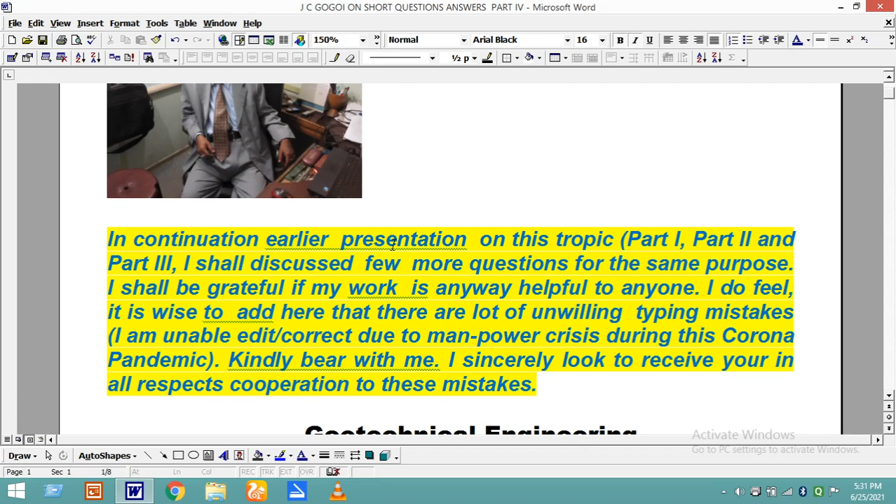One more important aspect I am adding here, that there are innumerable typing mistakes or printing mistakes, whatever it may be, which I am not able to edit or correct. I am looking forward to your active cooperation and to bear with me.

Today I am starting part 4.

Question: a 4-storied building was tilted and differential settlement of 150 mm was noticed. This 4-storied building, after construction, after few years, had a differential settlement of 150 mm noticed. Another condition is that the building cannot be demolished due to several adjacent buildings being there. The building was resting on timber pile foundation. So this building, having a differential settlement of 150 mm, resting on timber pile foundation - what shall be the safe proposition to restrict further settlement?

The answer options are: demolish top story, ground improvement, pile foundation at periphery, enlargement of pile cap to behave like footing foundation, or none of this.

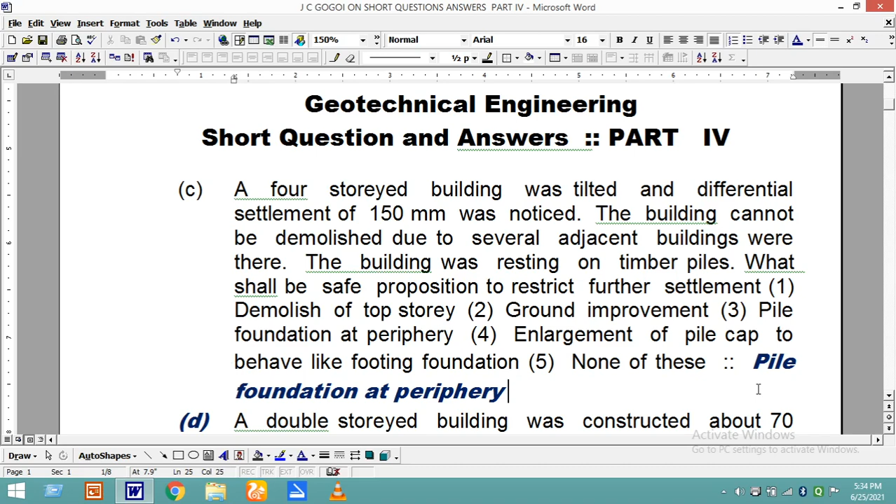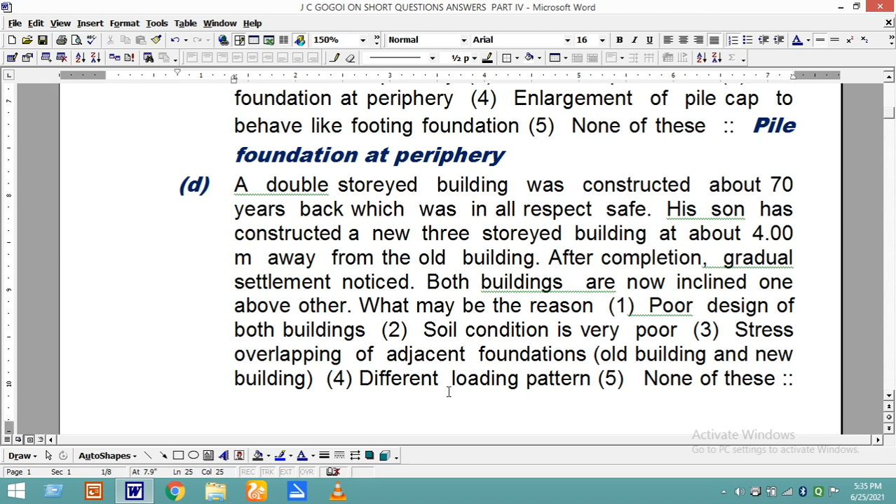A double-story building was constructed about 70 years back, which was in all respects safe. His son, in the second generation, constructed a new 3-storied building about 4 meters away from the old building. After completion, gradual settlement was noticed, and both buildings are now inclined one towards the other. What may be the reason? Answer options are: poor design of both the buildings, soil condition is very poor, stress overlapping of adjacent foundations of the old and new building, different loading pattern, or none of this.

Poor design - we cannot accept that because the life of the old building is 70 years with no such settlement reported. Soil condition being very poor was also not agreeable since the old building has stood for 70 years. So the main reason for settlement is stress overlapping of adjacent foundations.

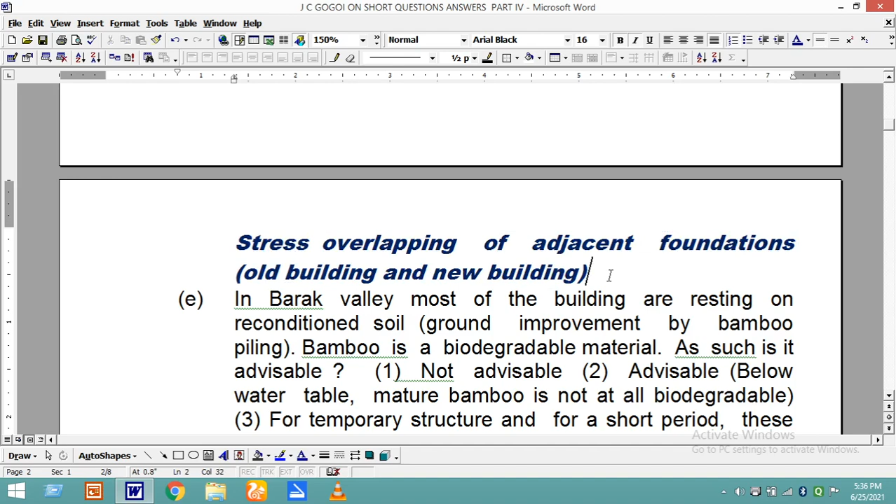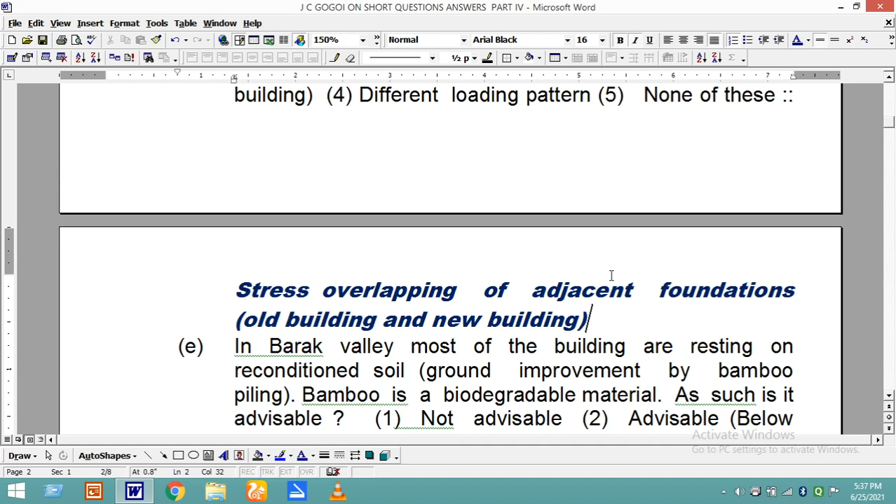Stress overlapping of adjacent foundation, because the buildings are closely spaced. The difference is 4 meters, meaning at least 2 meters from this building. The foundation will go out a minimum of 2 to 3 meters from this side, and from the other building, 2 to 3 meters from that side. So there is a stress overlapping - that point is heavily loaded, and for any soil strength, when there is different loading, almost double the loading, there shall be settlement.

In Barak Valley, most of the buildings are resting on reconditioned soil, ground improvement by bamboo piling. Bamboo is a biodegradable material - as such, is it advisable? The answer is not advisable, except below the water table. Mature bamboo is not at all biodegradable below water table, but for temporary structures for a short period, these are suitable, and the structure may collapse all of a sudden otherwise.

In most of the towns of Barak Valley, buildings are 3-4 stories, but the formation soil of Barak Valley is of carbonaceous shale origin. In the present situation, these are behaving like CH, highly plastic clay, but the origin is carbonaceous shale. So soil condition is not so good enough - up to 5-6 meters the soil condition is not good enough. So it is advisable to do ground improvement by bamboo nailing or bamboo piling.

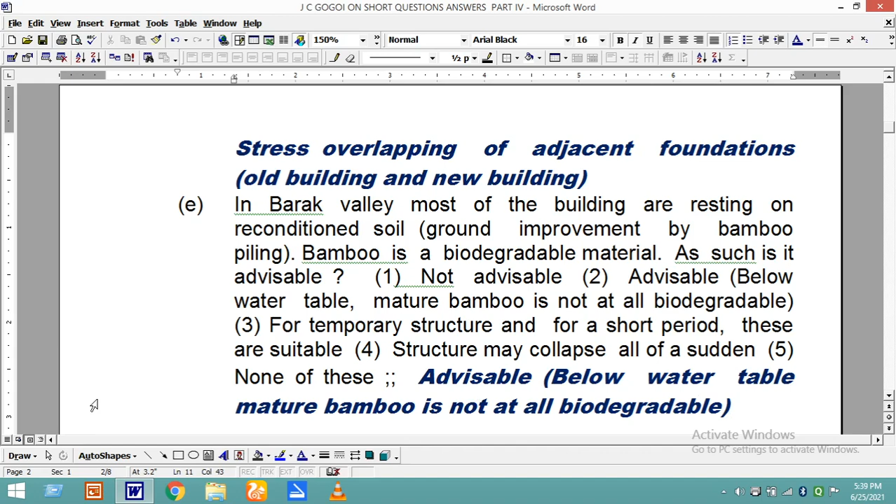Below water table, advisable. Below water table, mature bamboo is not at all biodegradable.

In rock bed, RQD, rock quality designation, is an important identification of strength of rock mass. The SBC, safe bearing capacity of rock, is generally calculated from uniaxial compressive strength, which we normally call UCS.

And discontinuity factor, discontinuity spacing, discontinuity thickness. Discontinuity factor is discontinuity spacing and thickness of discontinuity.

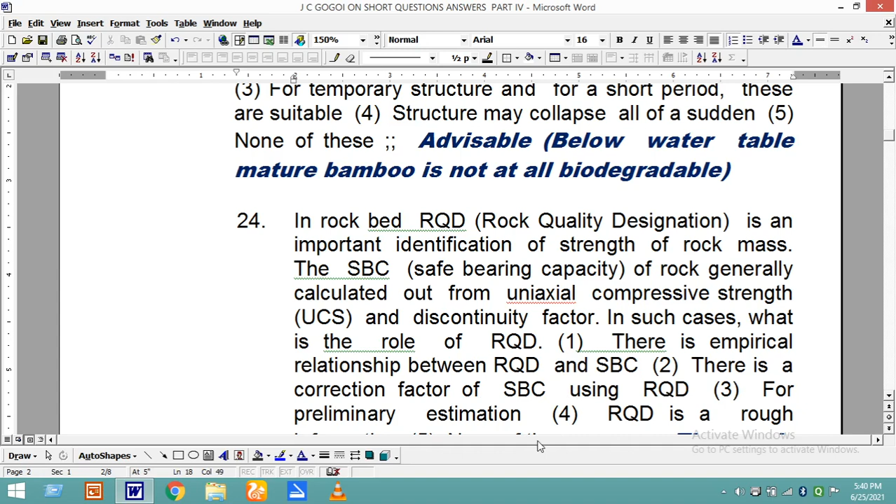In such cases, what is the role of RQD, rock quality designation? There is an empirical relationship between RQD and SBC, a correction factor of SBC using RQD. For preliminary estimation of SBC, RQD is a rough information. None of this - the correct answer is there is an empirical relationship between RQD and SBC.

Basically, when RQD is on higher side, the hardness of rock is increasing, that means shear strength of rock mass is higher. RQD is based on joints and fissures. More the joints, less the RQD.

So it will give us, before the present IS standard 12070, before publication of that IS standard, earlier the SBC was calculated from RQD value itself.

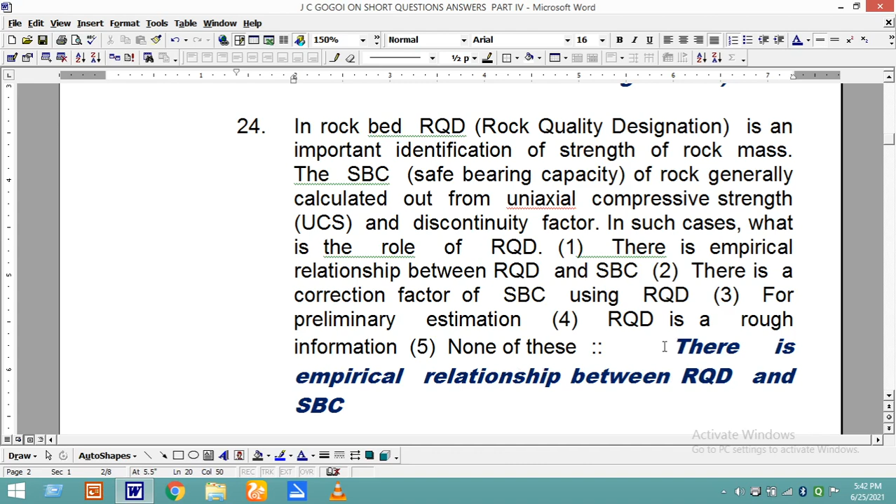SBC of rock bed was calculated with safety factor of 12 as 1 MPa against a settlement of 4 mm.

After construction, height of the superstructure required to be increased, resulting in increase of loads on foundation. In such cases, how much SBC can be increased without violating the IS clauses? Options: 1.5 MPa, 2 MPa, 3 MPa, no further increment, none of this.

You see, in rock, our permissible settlement as per IS code is 12 millimeter. So here we are getting 2 millimeter, 4 millimeter, and these are based on elastic modulus, stress-strain relationship.

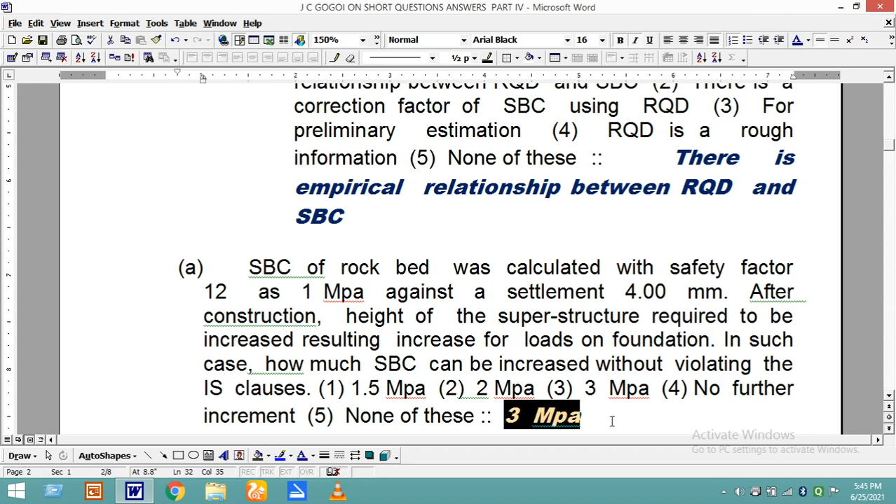A sound bedrock having SBC of 2 MPa, after due consideration of discontinuity and RQD, against a settlement of 2.5 millimeter. During construction, it was observed that the discontinuity thickness initially was very thin, in micromillimeters, but at the lower end it was found as 10 centimeter, greater than 10 centimeter thickness of discontinuity.

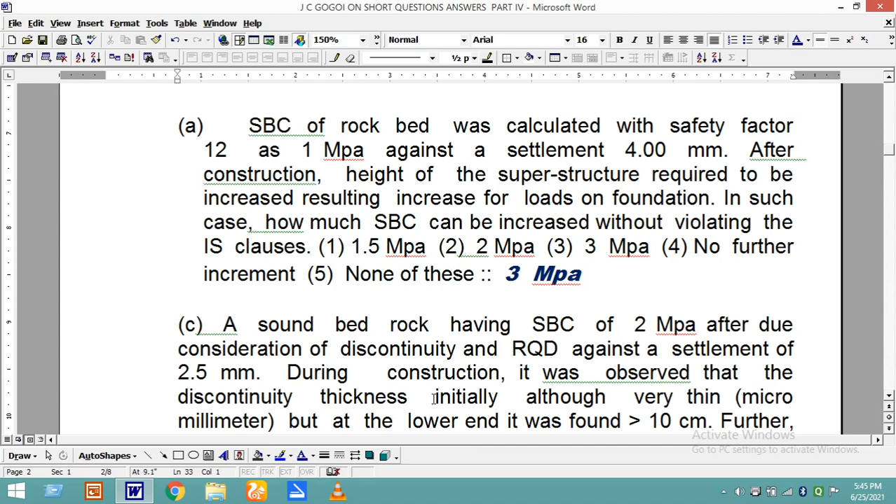Further, the discontinuity was at slope. Now, what inference can be drawn?

Options: SBC should be checked again considering discontinuity as 10 cm. Discontinuities should be filled with some rich cement grout under high pressure. Rock bolting of the foundation. Foundation shall be provided at further lower depth, meaning deeper depth. And none of this.

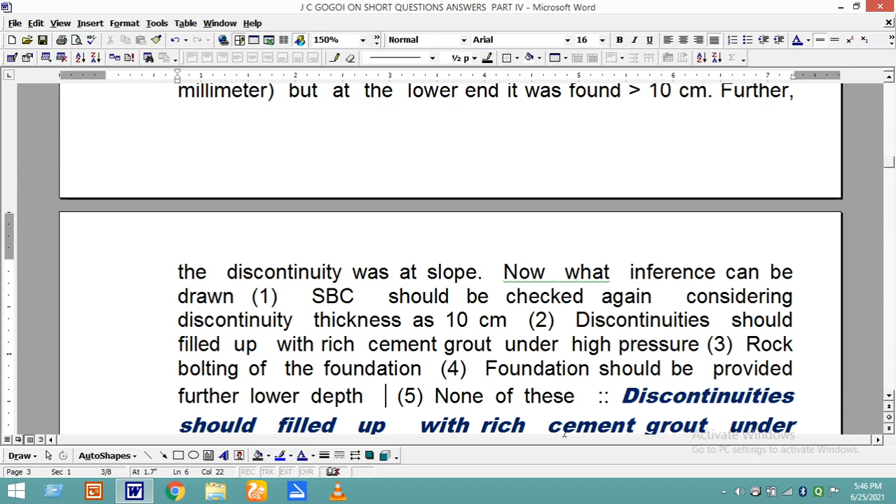In this condition, best option is discontinuity should be filled with rich cement grout under high pressure.

When there will be no joints, there shall be no discontinuity, and SBC shall be increased accordingly.

A structure was designed for a load of 1 MPa against a settlement of 6 mm. During construction, due to revision of IS code, the total load expected to be increased tremendously. Under this situation,

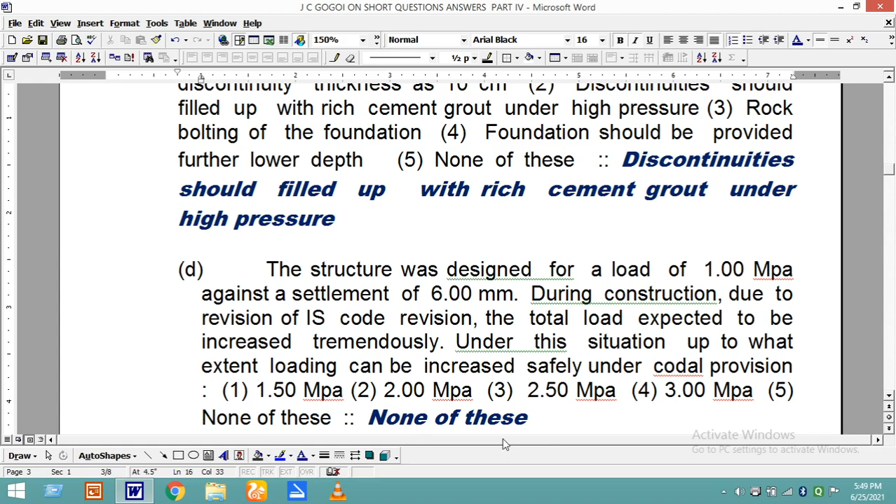An anticipated settlement of a 2 meter by 2 meter footing on bedrock, for a pressure intensity of 1 MPa, has been worked out as a settlement of 2 mm. Here one word was missing: settlement of 2 mm.

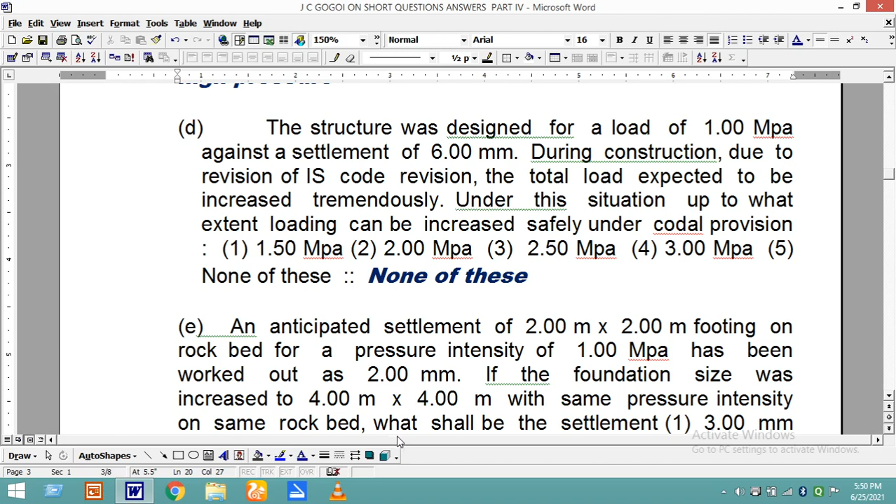If the foundation size was increased to 4 meter by 4 meter with the same pressure intensity on the same rock bed, what shall be the settlement? Here, foundation size is 2 meter, pressure intensity is 1 MPa, and settlement is 2 mm.

So because of increased load, with 4 meter by 4 meter and pressure intensity of 1 MPa, what shall be the settlement? Our question is, what shall be the settlement?

Since it is bedrock, our permissible limit is 12 mm, and we know the base is almost double. When the base is almost double in rock, it is P by B relationship, and other factors like stress-strain relationship, that is Poisson's ratio and elastic modulus, are the same for the same rock bed. So those factors are constant.

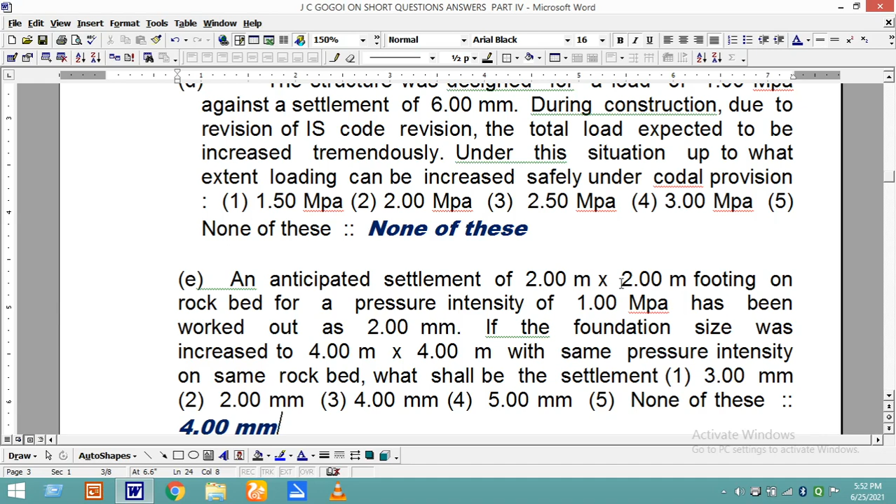It is known that fine-grained sand is derived from disintegration of rock due to rock weathering. But at the same time, it is considered that rock mass is completely free from scour. The rock may transform to fine-grained sand in future. Why is rock considered inerodible?

Given answer: weathering from rock to fine-grained sand requires millions of years, and the life of our design structure is about 100 years only. As code recommends, rock has permanent bondage, rock particles have permanent bondage. What is the difference between soil and rock? Rock compositions and rock materials have permanent bondage, but soil particles have no bondage, no permanent bondage.

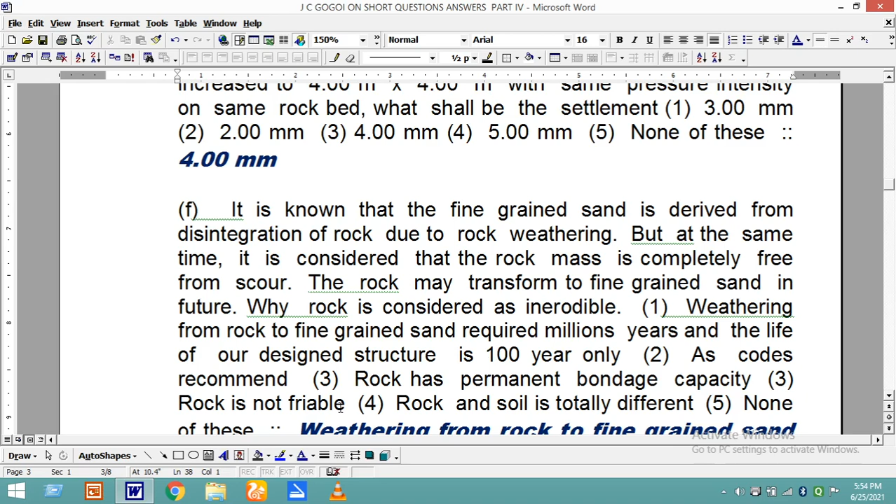Generally, although technical and engineering terms like scour exist, this is the general conception: all fine-grained sand, and all soils, are derived from rock weathering. Initially it becomes boulders, then cobbles, then gravels, then coarse sand, then fine sand, through repeated stages of weathering. Weathering from rock to fine-grained sand requires millions of years.

And the life of our design structures is 100 years only. We are designing for not more than 100 years. Some ancient monuments, like Qutub Minar and Taj Mahal, are exceptional cases, and at present their survival has become a survival process. So this existence no one can deny, but we cannot design for more than 100 years with the present working conditions, materials, and everything.

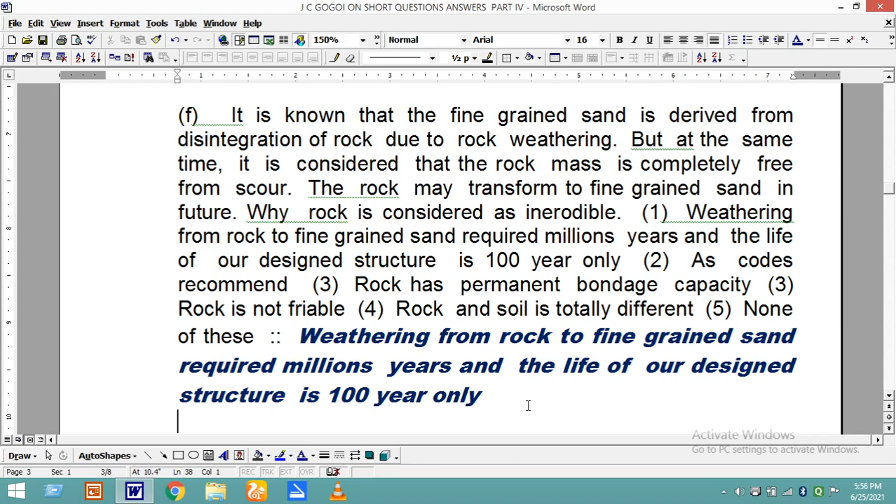Next question: generally RCC structures, superstructure, substructure and foundations are designed using the same analytical procedure, except foundation sizes for soil and rock which depend on SBC only. If for RCC structure on soil 60 millimeter settlement can be allowed, why can we not allow more than 12 millimeter in rock?

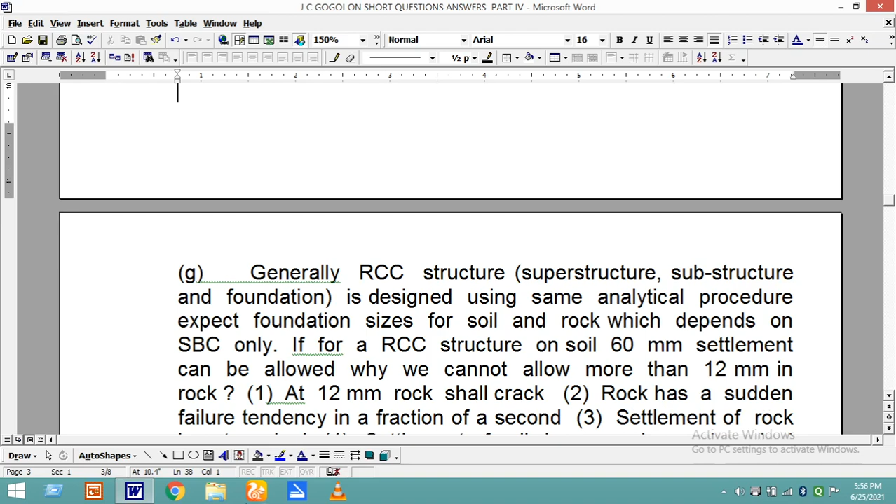In concrete, steel members are not friable. Steel gives us sufficient information, so gradually there will be some amount of tension, it gradually shears. But the concrete failure is all of a sudden. Like that, rock has a sudden failure tendency in a fraction of a second.

If you are testing rock mass in the laboratory, you can easily observe that the lowest strain diameter, no one can record. Whatever instrument it may be, digital or otherwise, it is taking stress continuously, taking stress at a nominal moment of strain. Stress is taken, and suddenly it will fail down; there will be shear. So rock has a sudden failure tendency like concrete, so we cannot go for 60 mm.

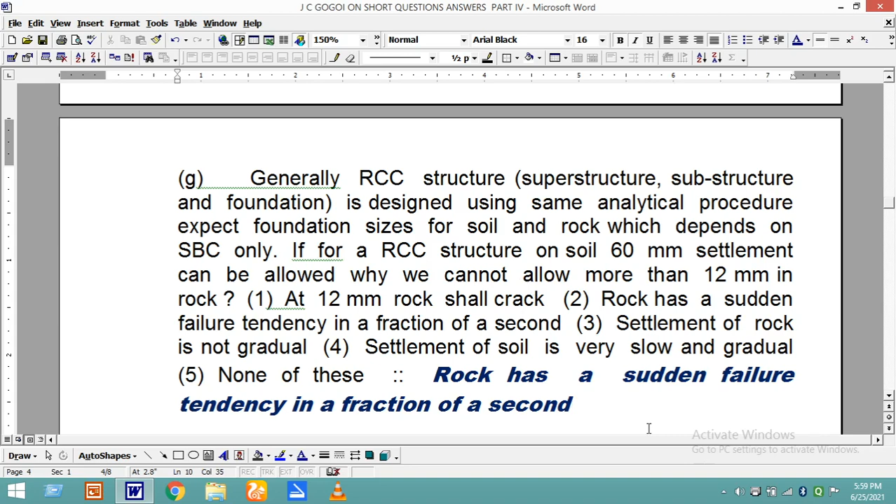What type of drilling is suitable for sampling rock samples for laboratory tests? The given answer is diamond core drilling, done slowly under nominal pressure, as opposed to percussion drilling, rotary mud drilling, or standard penetration test, none of these. The best option for getting good quality core for laboratory tests is diamond core drilling.

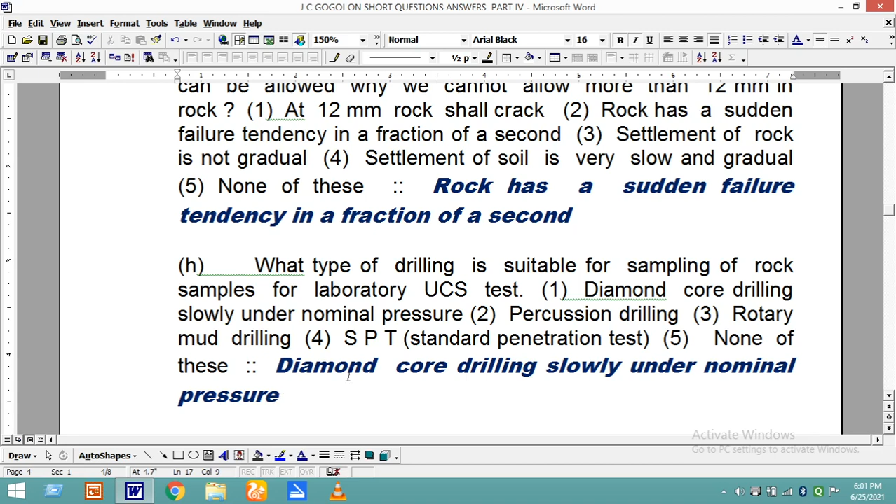Slowly under nominal pressure. Pressure shall be very nominal and slow; we should not be hurried. Slowly we can get very good quality test specimens. With percussion drilling, you can make only the hole, you cannot get core. In rotary mud bore, in some cases the core gets blocked with mud circulation, and sometimes the RQD becomes very less due to sudden shear inside the barrel itself. SPT cannot penetrate more than 1 or 2 centimeters. So diamond core drilling under nominal pressure is best for getting suitable core for laboratory tests from rock bed.

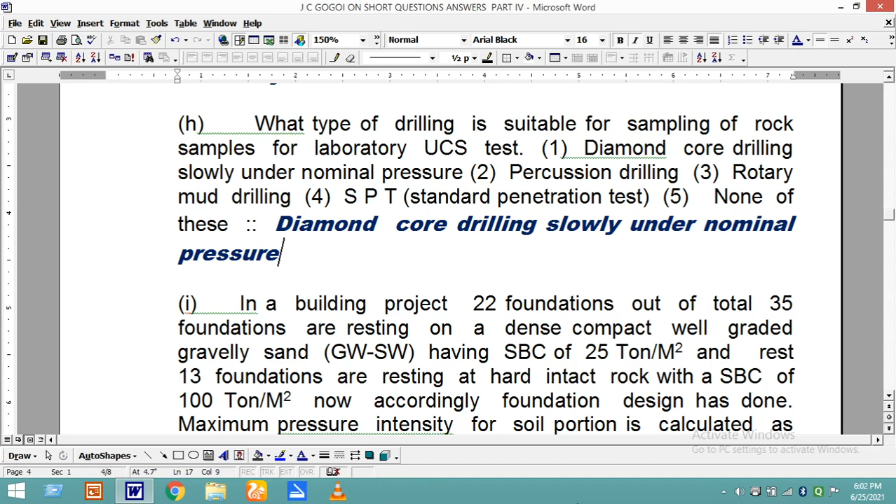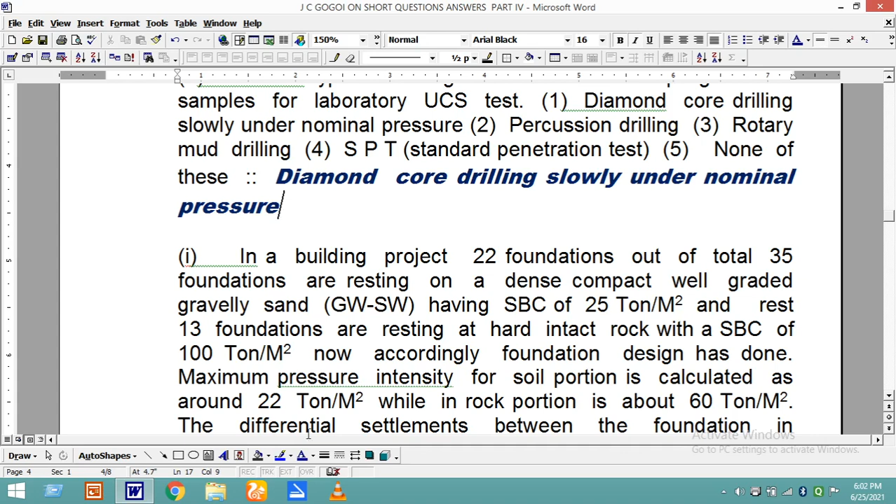In a building project, 22 foundations out of total 35 are resting on dense, compact, well-graded gravelly sand, soil type GW/SW, having SBC of 25 ton per meter square, that is 2.5 kg per cm square. The rest 13 foundations are resting on hard intact rock with SBC of 100 ton per meter square. Accordingly, foundation design has been done. Maximum pressure intensity of the soil portion is calculated as around 22 ton per meter square, while in the rock portion the maximum pressure intensity is 60 ton per meter square. The differential settlement between the foundation on soil and rock has been calculated as 1 in 600.

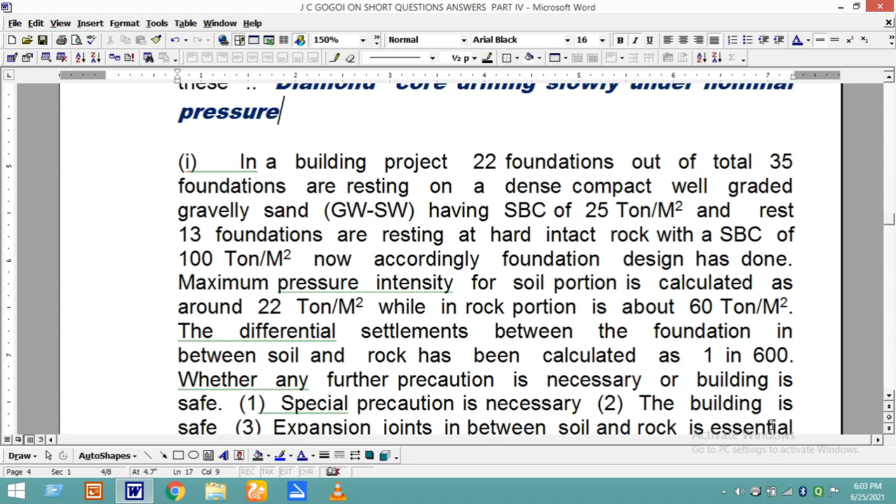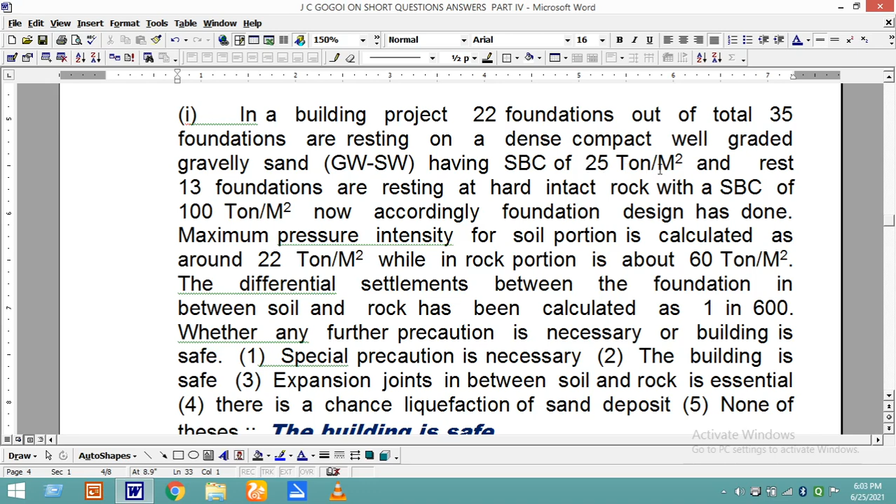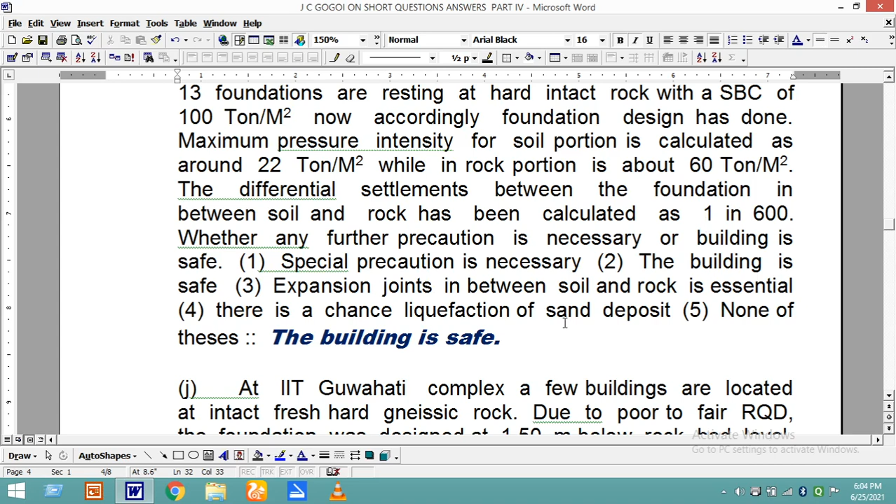The important criteria here are differential settlement of 1 in 600, and pressure intensity - 100 ton for rock and 25 ton for soil as allowable, against 60 ton for rock and 22 ton for soil after distribution of load. This is safe since it is less than 100, and this is also safe since it is less than 25. The only difference may be in settlement, since one portion is rock and the other is soil, so differential settlement is 1 in 600. Our maximum permissible limit is 1 in 400. Since 1 in 600 is smaller than that limit, the building is safe. Undoubtedly, the building is safe.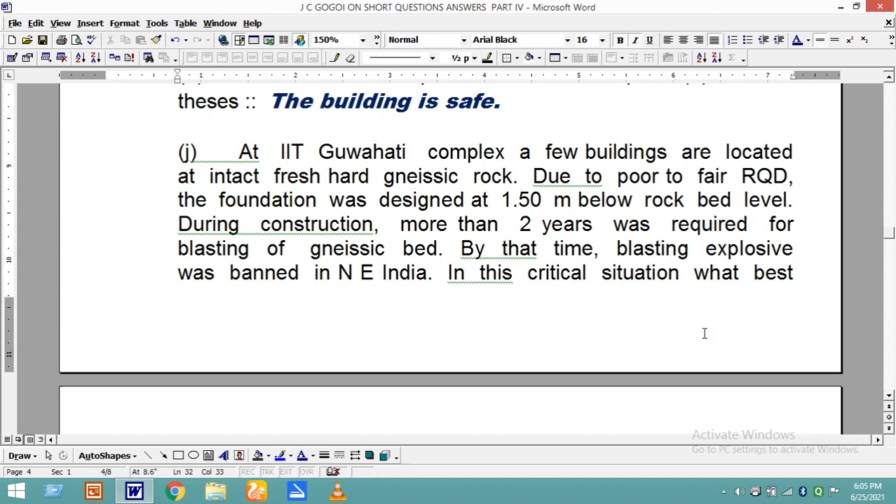At IIT Guwahati complex, a few buildings are located on intact fresh hard gneissic rock. Due to poor to fair RQD, the foundation was designed at 1.5 meter below rock bed level. During construction, more than 2 years were required for blasting of the gneissic bed. By that time, blasting explosive was banned in northeast India. In this critical situation, what can be done keeping safety of the structure in view?

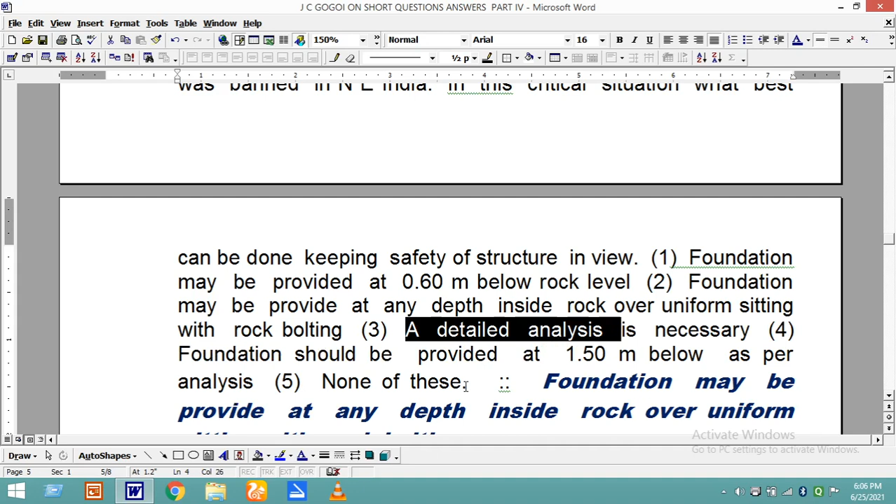Options given: foundation may be provided at 0.6 meter below rock level; foundation may be provided at any depth inside rock mass over uniform seating and with rock bolting, with detailed analysis necessary; or foundation should be provided at 1.5 meter below as per analysis.

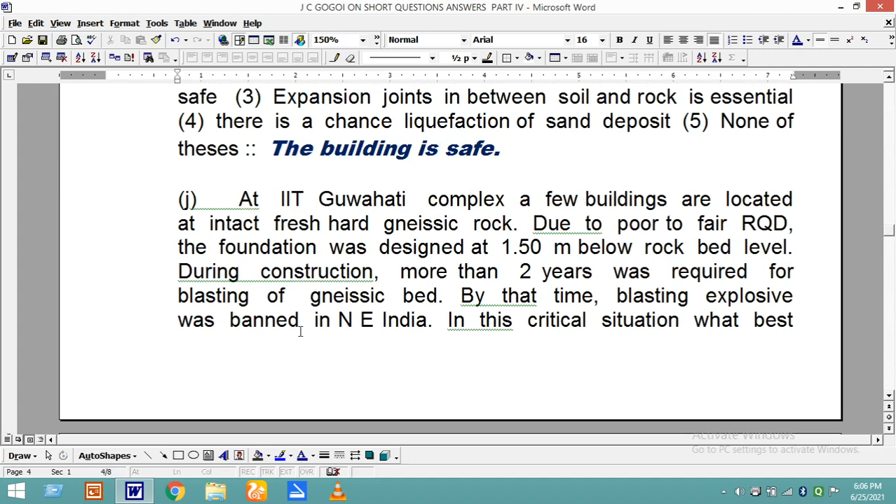Here you see there are two complications. One complication is that blasting became very difficult - for 2 years only the foundation work got spoiled. And when explosives are banned items, it is very difficult to get them. Getting explosive may not be difficult, but it will be a criminal offense. Another thing is, what will this mean - our basic purpose is that the building should be safe and workable.

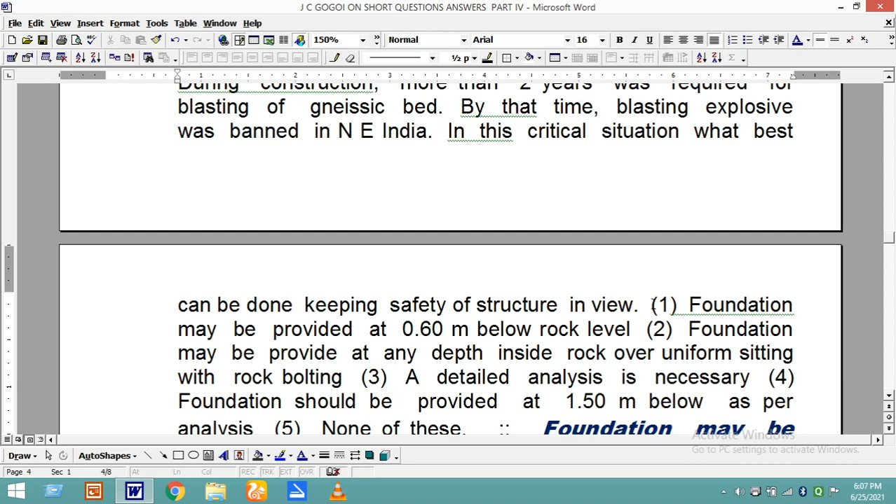So in such cases, the correct answer is: foundation may be provided at any depth inside rock over uniform seating with rock bolting. That means when we provide the foundation at rock, the seating should be uniform, and for tension load, especially in Zone 5, the foundation shall be bolted with rock bed so that there will be no tension problem.

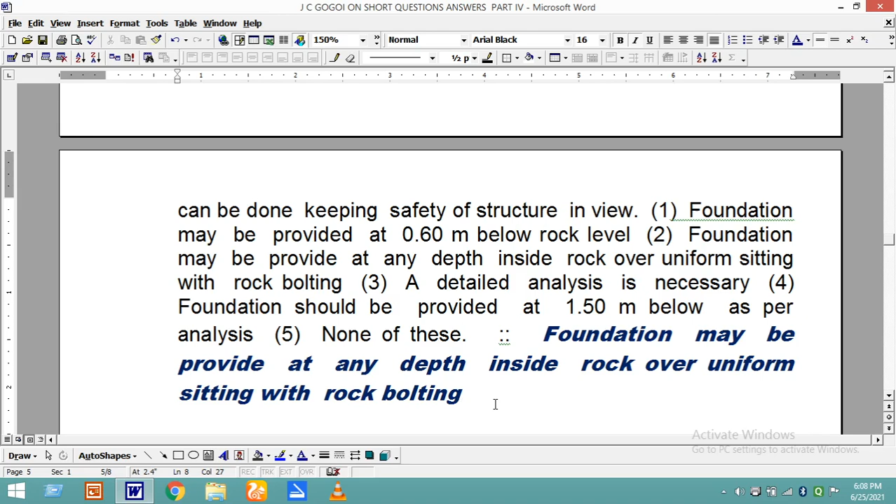Miscellaneous: since last few years, people of urban areas, especially Guwahati citizens, are facing artificial floods even with ordinary rainfall. What is the basic reason behind this? Is it improper drainage system, drains blocked by plastic and non-degradable materials, increasing rainfall intensity, global climatic changes, or none of this? What shall be the correct answer?

When drainage system is proper, rainwater will go out. But here, because of improper drainage system, the water cannot pass. Improper means either the slope is not proper, or the size of the drain is not sufficient to drain out the rainwater, and the outlet where water was going, the water level at that point may be little higher. So there are lot of important parameters there, and these are not properly considered.

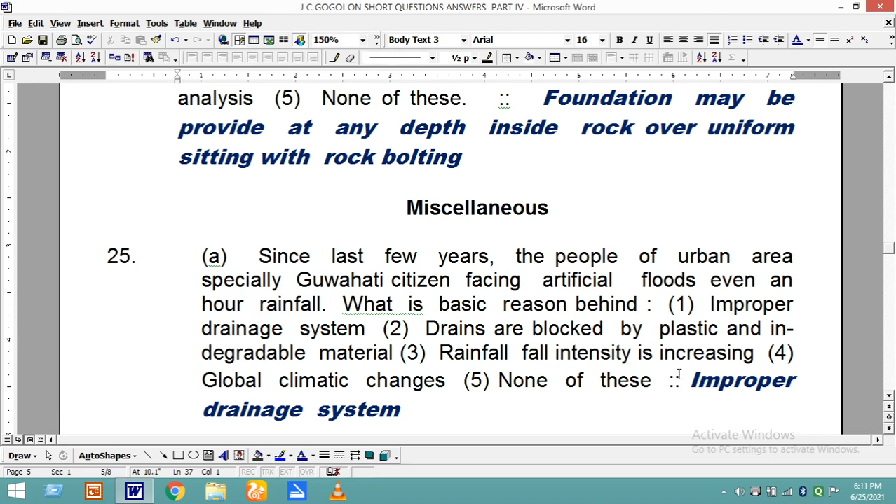As stated in A, in this question, as an engineer, what is your opinion to make Guwahati a flood-free city? Given answer is raising the entire city, making more drains, constructing catchwater drain, rainwater harvesting, or none of this. You see, I am residing at Guwahati.

I am from Guwahati itself. So raising the entire city is a very difficult proposition which can be made on a drawing sheet only. Making more drains is impossible. There is no free land for construction of drains. Constructing catchwater drain, we can make it on papers.

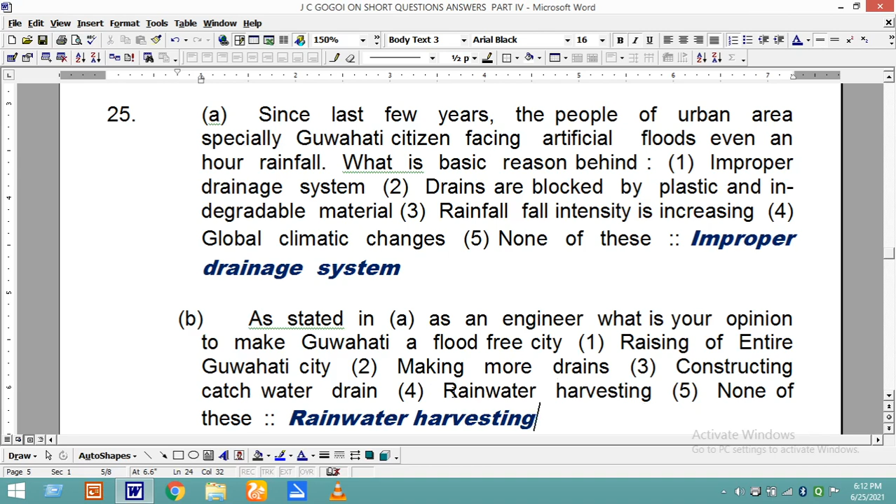Rainwater harvesting? Yes. If we penetrate the rainwater totally underground through rainwater harvesting, then Guwahati shall be free from all artificial floods. It is out of record. If you have any good solution than this, please let me know so that I can present it to our government. Next question is, the total land area of Majuli, the world's biggest river island, was 1255 square kilometers in 1901.

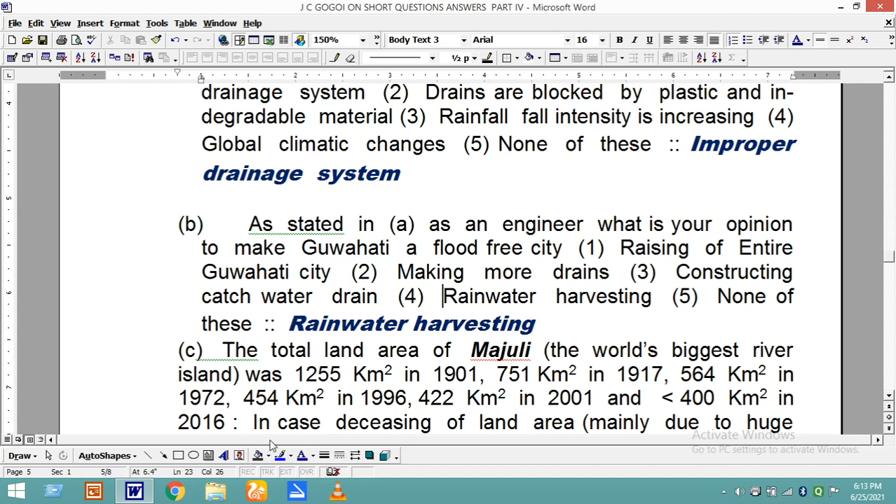751 square kilometers in 1917, 564 square kilometers in 1972, 454 square kilometers in 1996, 422 square kilometers in 2001, and less than 400 in 2016. In case of decrease in land area, mainly due to huge bank erosion by river Brahmaputra, this may become the world's smallest island, even smaller than Umananda at Guwahati.

Guwahati, by the end of 2045 - as an engineer, do you agree? You see, if we go for a statistical analysis, it is gradually decreasing. From 1901 it was 1255, and in 2016 it is nearest to 400, less than 400, and in 2001, in these 100 years - not 100 years, how much?

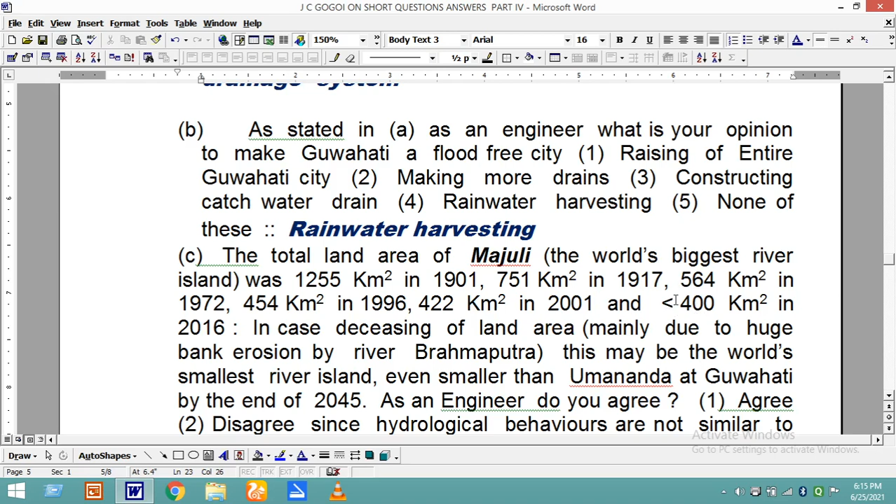90. It is 100 years. During 100 years, it went from 1255 to 422. And during these 15 years, it is decreasing even more. As an engineer, the question is, do you agree with this? It will be decreasing by 2045, it will become smaller than the smallest river island. Umananda is the world's smallest river island. During 2045, it will become smaller than Umananda.

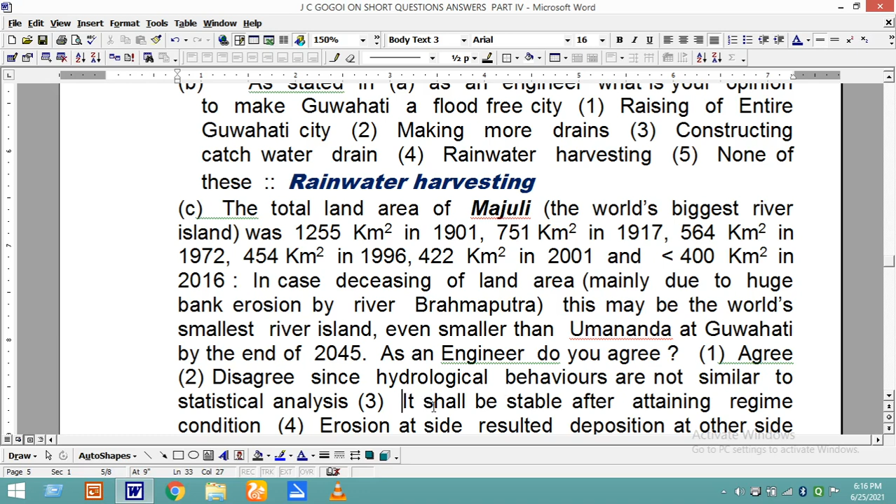Do you agree or not? Given answer is agree. Another is disagree. Another answer is it shall be stable after attaining regime condition. Another is erosion at side resulted in deposition at other side. None of this.

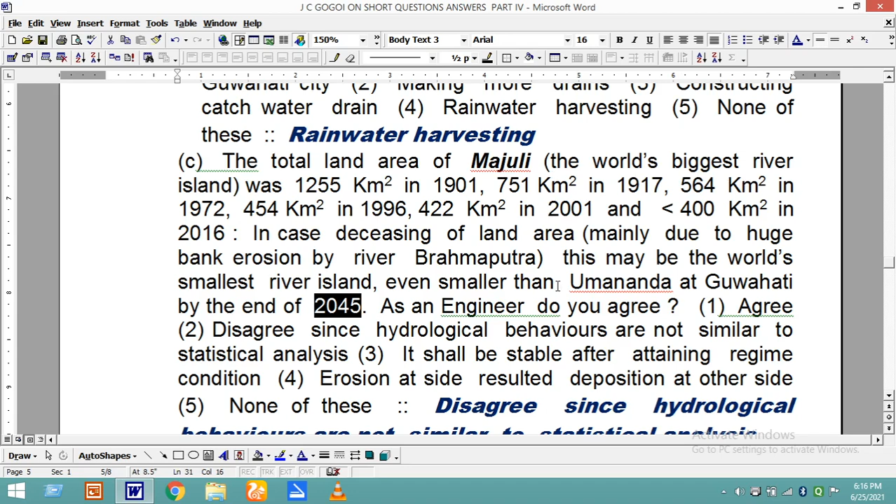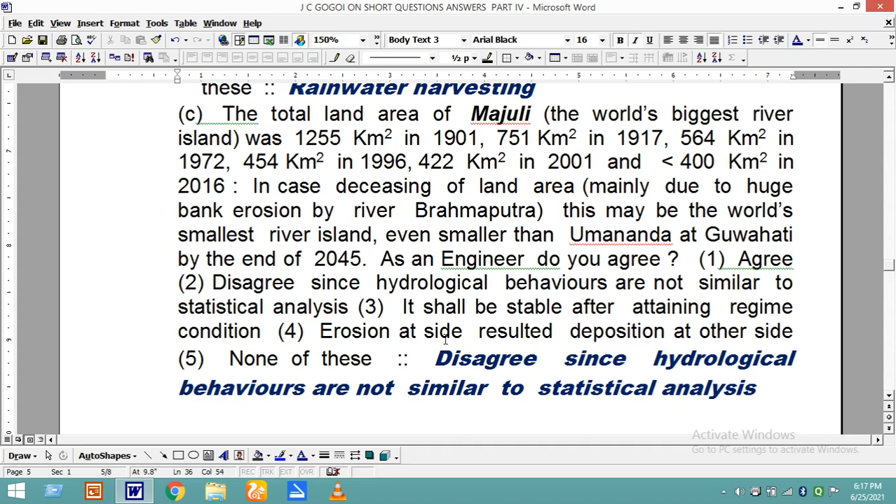Disagree. Given answer is disagree, since hydrological behaviors are not similar to statistical analysis. Because you see, this 2045 figure was calculated on the basis of statistical data. So in hydrological behavior, erosion and deposition, these behaviors are not similar to statistical analysis. Not similar, no, it is not statistics. So our answer is disagree, since hydrological behaviors are not similar to statistical analysis.

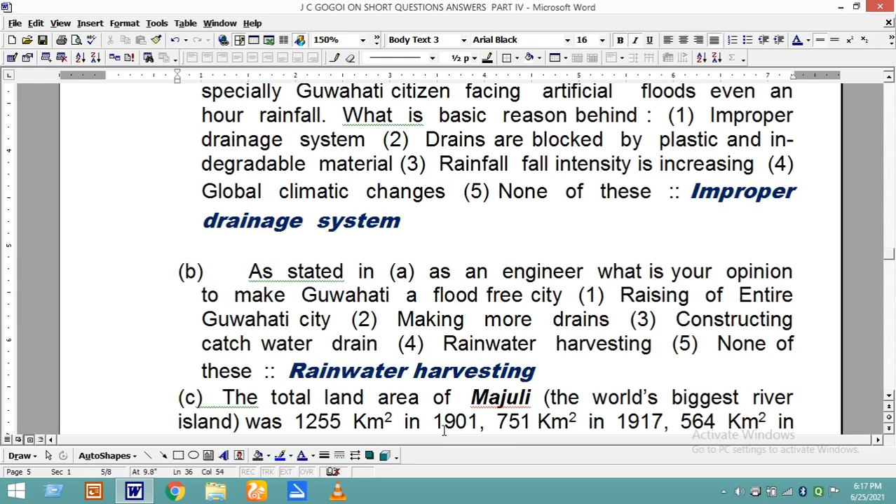Floods in Assam is a major unbeatable problem of the state. It is also lagging far behind other states of the country. In addition to this, a huge amount is wasted in the name of flood damage repairing work, which results in slow development activities. As an engineer, what do you think is the basic cause of the flood? Formation of innumerable sandbars at the riverbed. Assam is surrounded by hills on almost all sides, with friable loose bank material, heavy suspended load, or none of this.

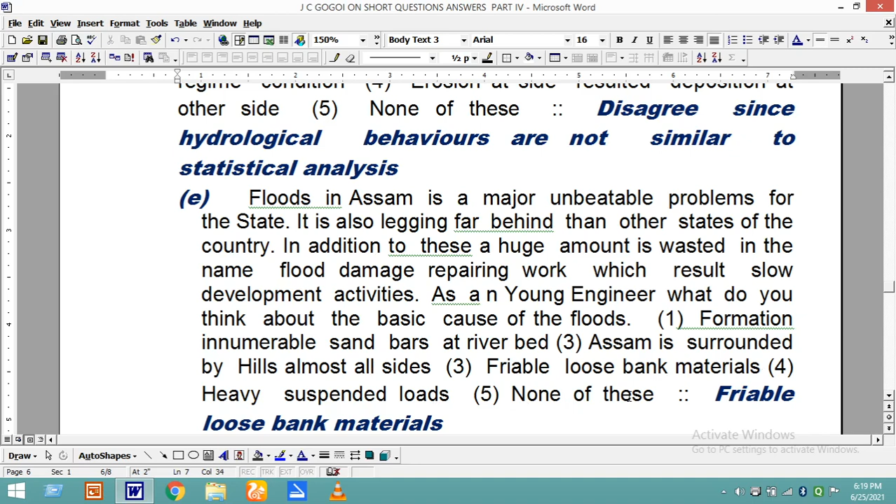If you get a chance to visit Assam, please spend 1 to 3 hours at the river bank of Brahmaputra. Even in winter, erosion at the banks can be noticed. In flood season, in monsoon, it doesn't matter - even in winter, in the dry season, banks are eroded because of the friable loose bank material.

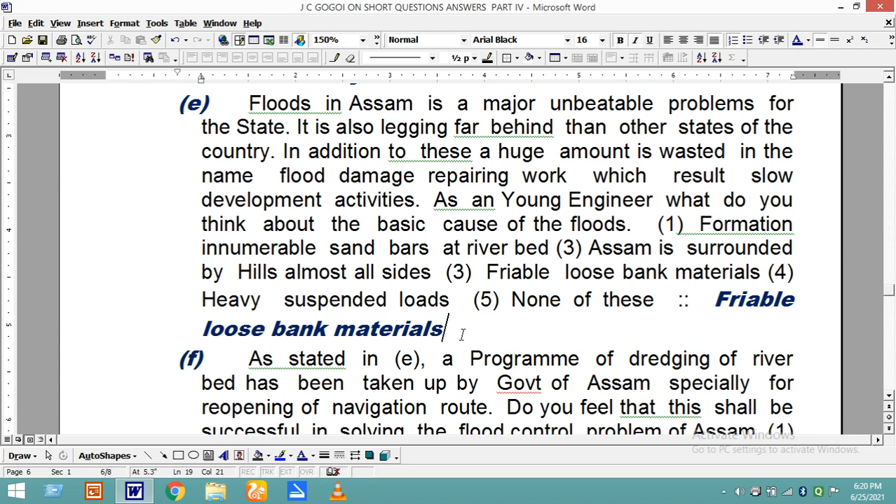It has no resistance; only with seepage water can it be eroded. During dry season, seepage waters pass there - seepage from the river bank flowing to the river. With that seepage water, the bank's material is also removed, leaving friable loose bank material.

As stated, a program of dredging of the river bed has been taken by the Government of Assam, especially for reopening the navigation route. Do you feel this shall be successful in solving the flood control problem in Assam?

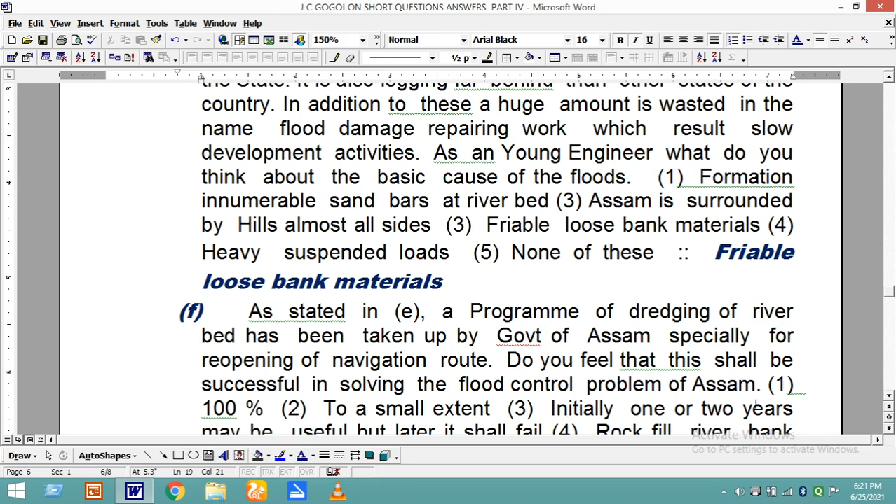The given answer is 100% successful to a small extent. Initially, one or two years may be useful, but later on it shall fail. Only rock fill river bank shall be successful, none of the other options.

As told earlier, bank erosion is the major criteria for the flood, because these rivers are carrying silt from China to Assam across a long distance, carrying innumerable rivers both in Tibet, Arunachal Hills, Nagaland Hills, and Bhutan - all coming together to meet the Brahmaputra, and all these rivers carry suspended load.

So finally, the required waterway is decreasing. For passing out the flood discharge at a constant velocity, it becomes difficult since the waterway is not increased. So water is coming up, banks are inundated, and everywhere there is heavy damage.

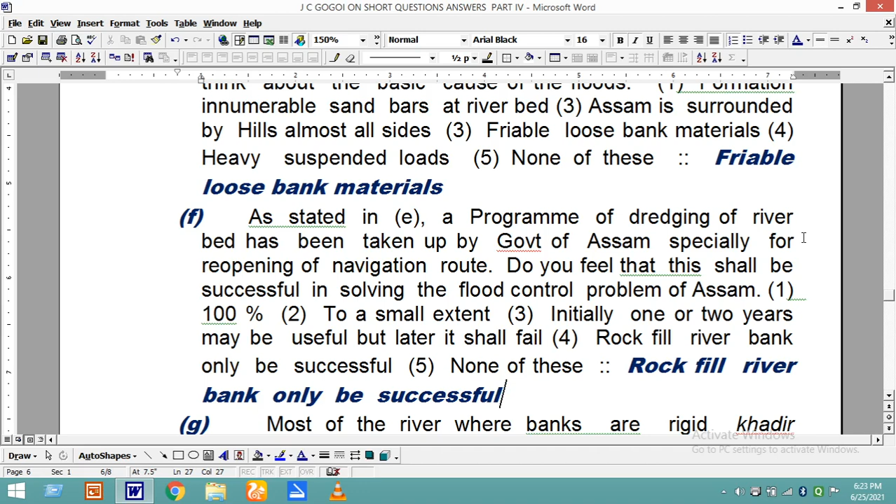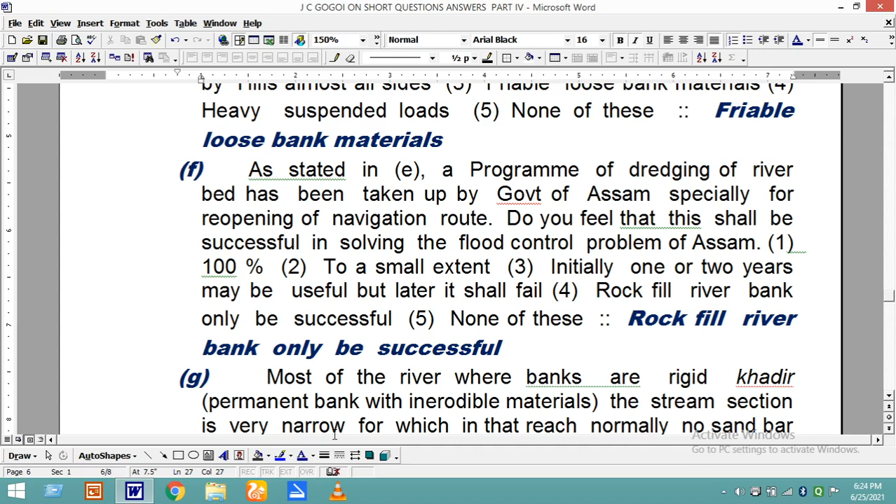Most rivers where banks are rigid are called Khadir - a word of irrigation engineering. An inerodible bank, a permanent bank of a river, is called Khadir. The stream section there is very narrow, for which in that reach normally no sandbar is noticed.

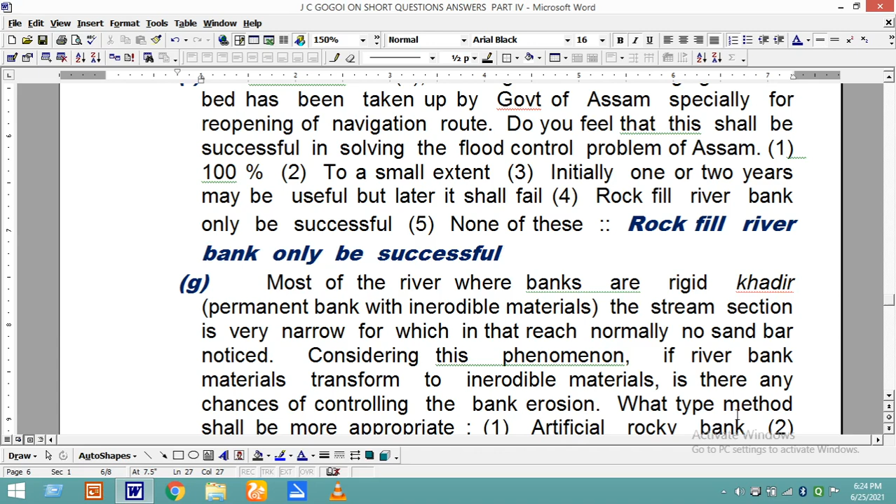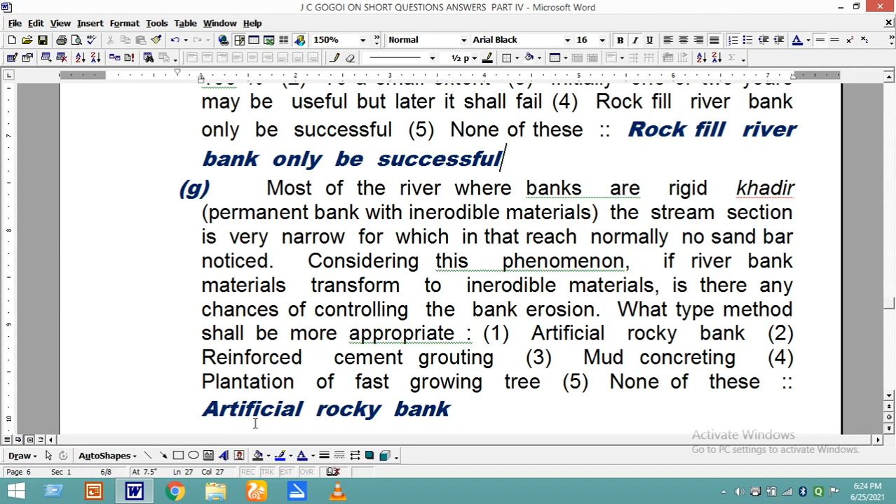Considering this phenomenon, if the river bank material is transformed to inerodible material, is there any chance of controlling bank erosion? What type of method shall be more appropriate - artificial rocky bank, reinforced cement grouting, mud concreting, plantation of fast growing trees, or none of these?

We know that when inerodible bank materials are there and banks are permanent, the river width shall generally be narrow. So in those rivers, sediment loads are very less because of velocity, since both banks are inerodible and maintaining the bank properly.

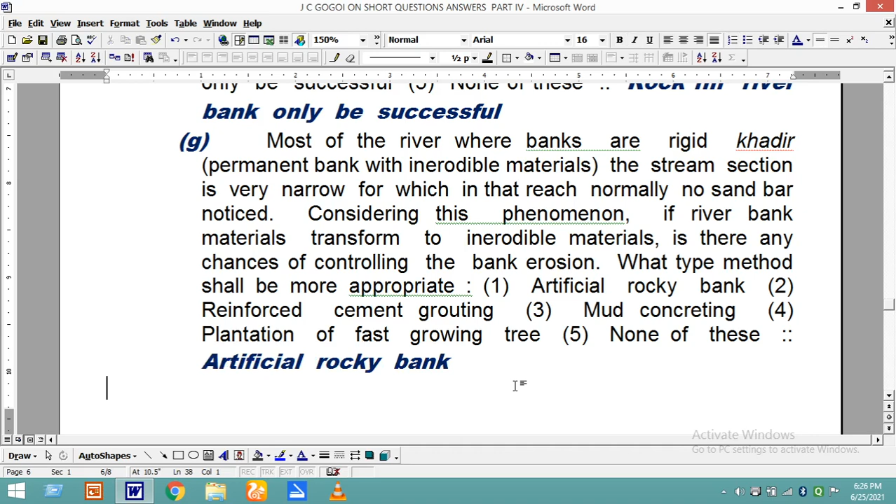In this case, if we can convert the river bank to an inerodible state by providing artificial material - reinforced cement grouting at the bank or some other cementing material - we can resist bank erosion. But out of all this, the best option is artificial rocky bank: if we dump some boulders and put in cement grout, it will behave like monolithic hard rock, so there will be no scour at all.

The Government of Assam is taking up a project of renovation and development works at Nilachal Hill, especially a decorated shade over Mekhela Uja Path, the rock staircase constructed by King Narak Asur about 10,000 years ago, without any change, alteration, addition, or destruction of the existing staircase. The existing staircase is rock-cut, made by manual cutting of the steps. It is more than 900 meters in total length, on a very steep hill, with a length of 950 meters.

The site is so difficult that the left side is densely populated and the right side is a very steep hill. After careful observation, experts decided to provide a design with a grade beam at each side from bottom to top to support the superstructure. The formation is weathered, jointed and fractured granite bed.

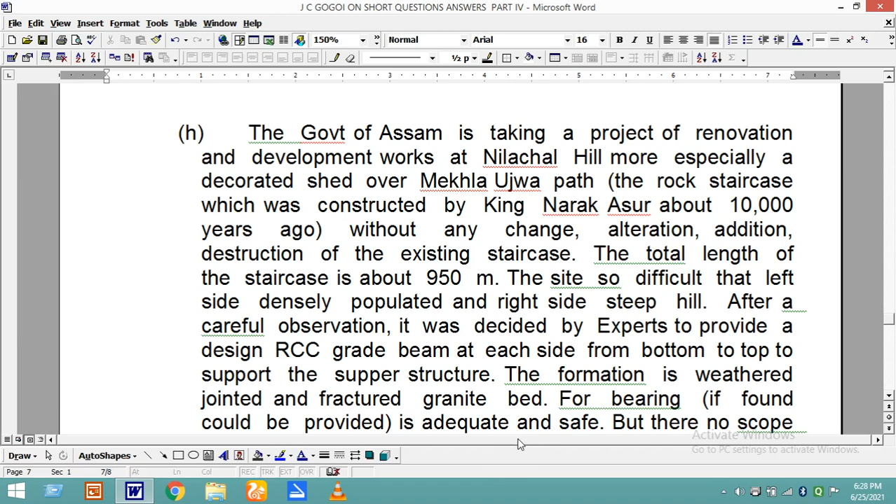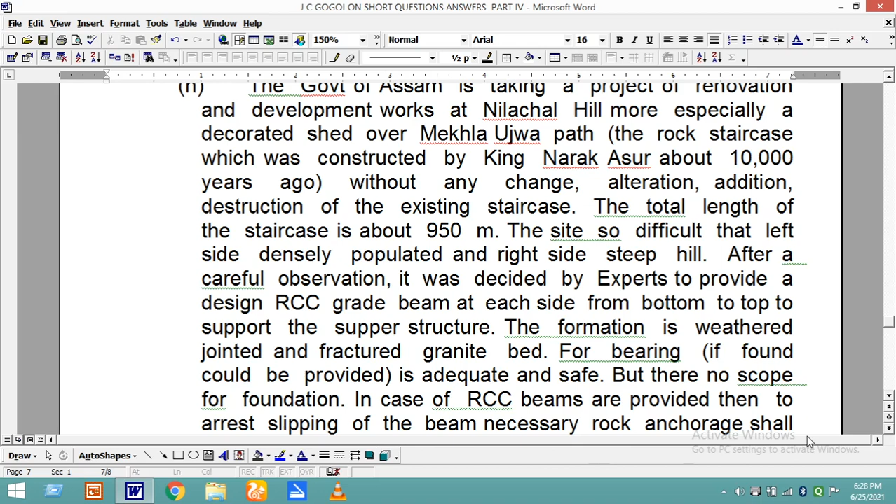If a foundation were to be provided, the bearing capacity is adequate and safe, but there is no scope for a foundation. In case of RCC, beams are provided, then to arrest slipping of the beam, necessary rock anchorage shall be required, in case the hill is disturbed - since any disturbance may cause a heavy landslide.

Under these circumstances, what type of drilling is suitable for rock anchorage - any type of drilling, percussion drilling, rotary core drilling, rotary non-core drilling, or none of these? Can you understand the history?

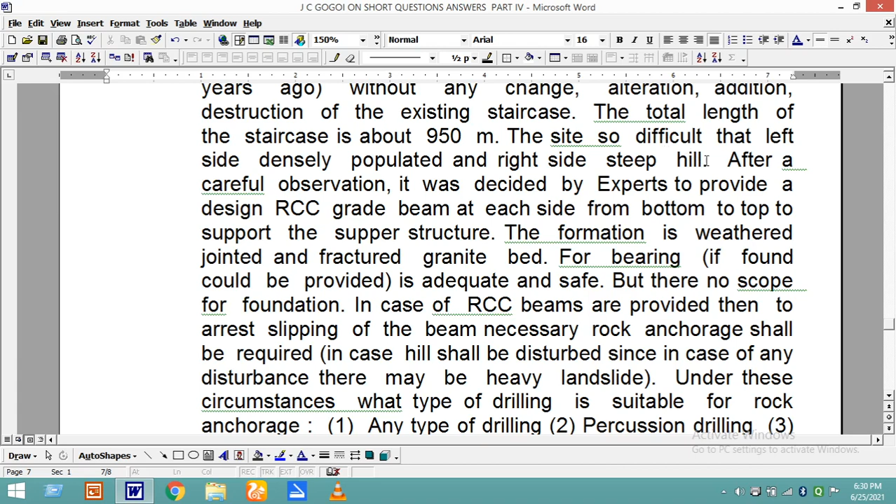There is a granite bed from bottom to top, and on the left side of this staircase, the staircase is rock-made, handmade, 950 meters in length, and we cannot go for any type of foundation for this proposed light structure. We have to make an RCC grade beam from bottom to top, and there is a possibility of slipping of the beams, so the beams shall be fixed - there is no other option. We have to anchor the beam with the rock bed.

In such cases, what type of drilling is suitable? Because in case of the slightest disturbance, there shall be heavy landslide. So here a special type of drilling shall be required: rotary non-coring. Rotary coring or non-coring are both similar, but non-coring will be a little faster, so slightly more economical, while coring will be a little costly. So rotary non-coring drilling is the answer.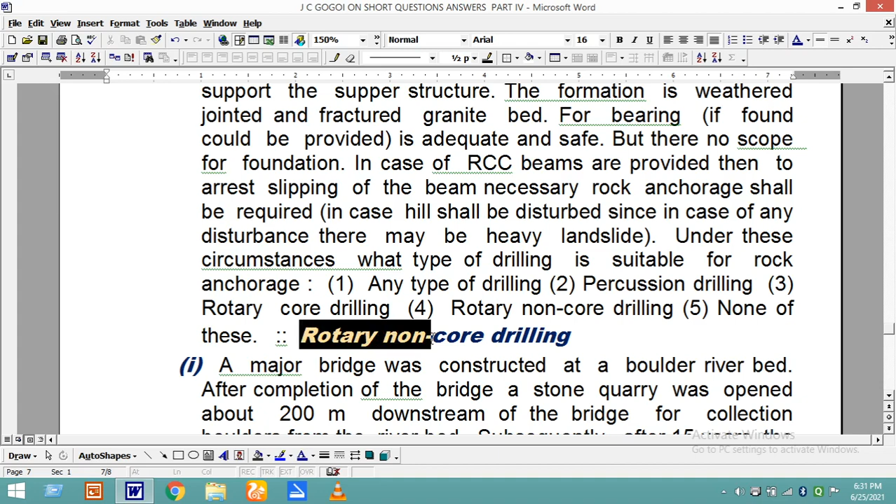A major bridge was constructed at a boulder river bed. After completion of the bridge, a stone quarry was opened about 200 meters downstream of the bridge for collection of boulders from the river bed. Subsequently, after 15 years, the two pier foundations settled down, which cannot be rehabilitated.

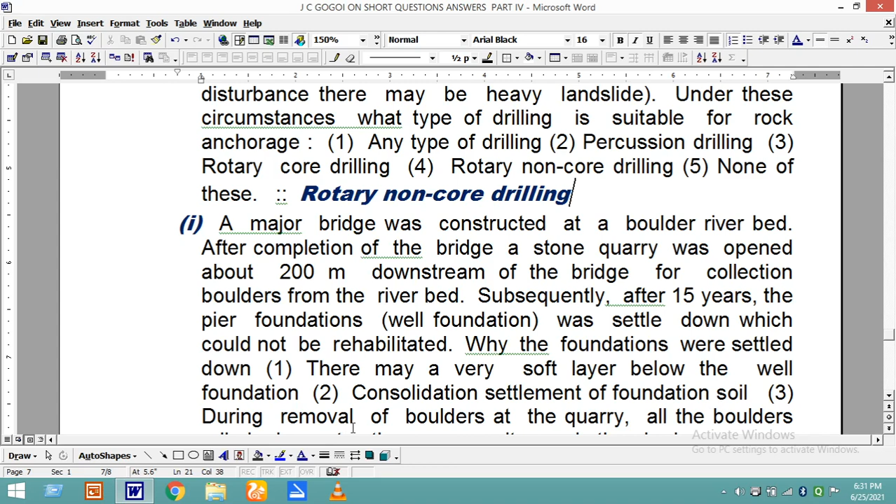Why was the foundation settled down? There may be a soft layer below the well foundation, consolidation settlement of the foundation soil during removal of boulders at the quarry. All the boulders rolled down to the quarry site and the bed scour started near the foundation. Insufficient length of the well. Or none of this.

See, boulders are almost round in shape. With river velocity, they were rolling down. If velocity is more, they will be easily rolled down.

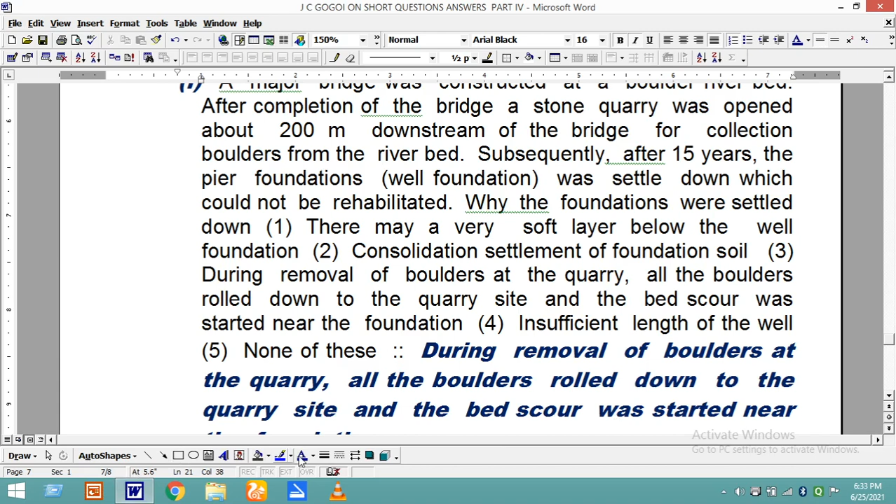Since the quarry opened 200 meters downstream of the bridge, the velocity will be increasing because of the steep slope created. During removal of the boulders from the quarry, there will be some steep slope, and velocity will be increasing. In such condition, during removal of boulders at the quarry, all the boulders rolled down to the quarry site and the bed scour started near the foundations.

So we should not permit quarrying at downstream, no such quarry should be permitted at all. At upstream, about 2 kilometers beyond, we can go for boulder quarry.

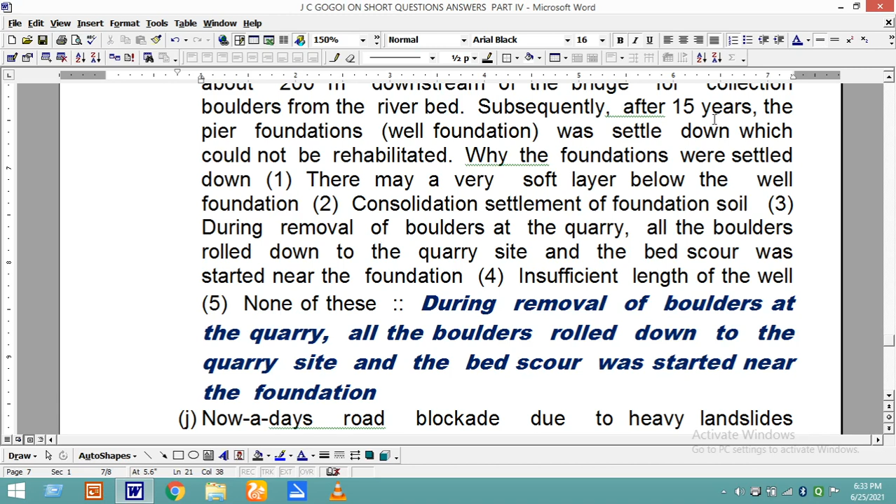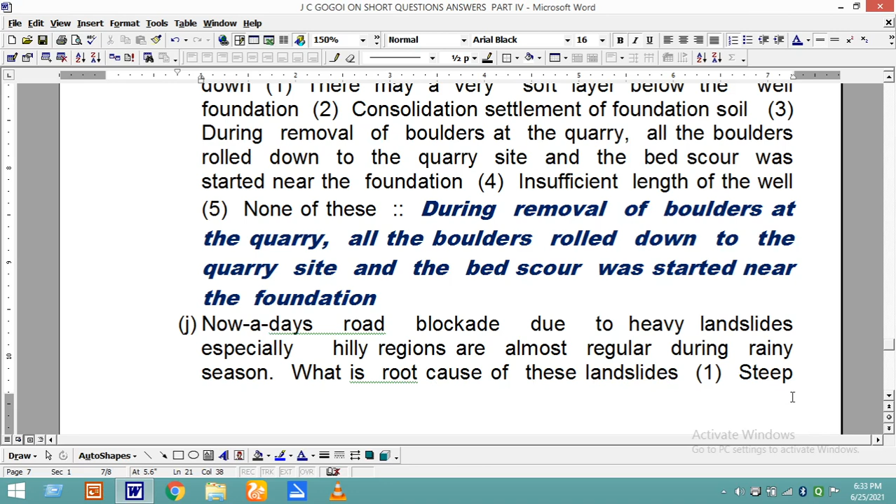Nowadays, road blockade due to heavy landslide, especially in hilly regions, is almost regular during the rainy season. What is the root cause of this landslide? Given options: nature, steep slope, inadequate protection, deforestation, imbalanced rainwater receipt and evaporation, inadequate surface drainage system, or none of this.

You see, all over India, the same thing is happening. Very recently, a lot of landslides were reported in Uttarakhand, in the Himalayan ranges. A lot of landslides were noticed, and all roads were closed for 2-3 days like that. It is only because of deforestation.

If we go back 1,000 years, imagine the same river was there, the same amount of rainfall was there, but no such things were reported. People were going to this hilltop on barefoot only.

But when our civilization started, we started cutting our plants and everything. We are not going for afforestation. So, what is the benefit of the plants?

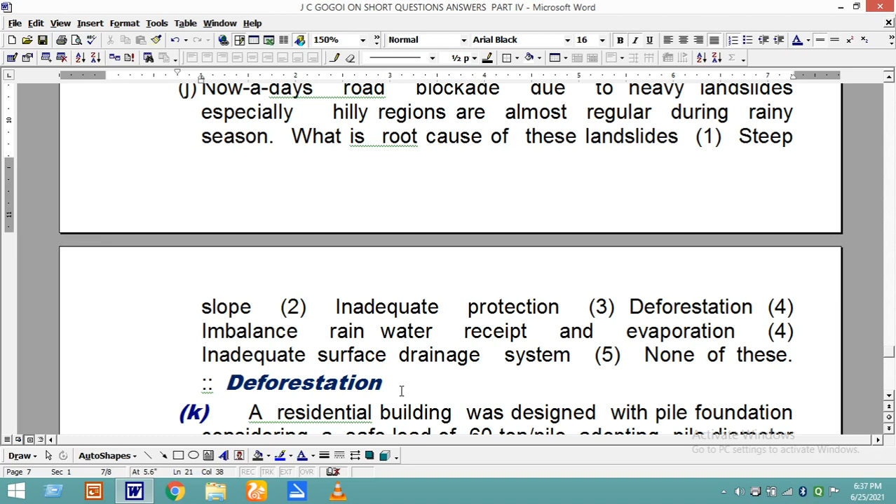Next question. A residential building was designed with a pile foundation considering a safe load of 60 ton per pile adopting a pile diameter of 500 mm. During initial pile load tests, the safe load had been calculated as 50 ton per pile. What shall be the best alternative for the shortfall? Given answers: provision of extra pile in group, proportional increase of pile length, proportional increase of pile diameter, revised pile load estimation, or none of this.

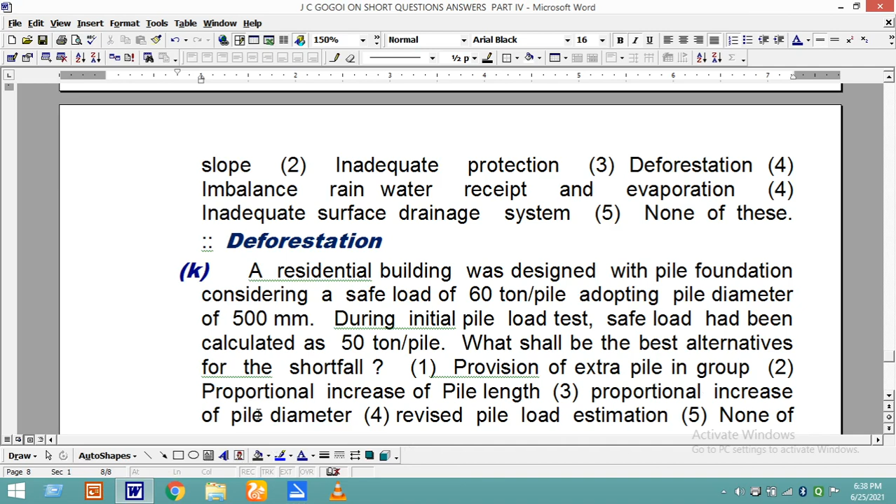You see, to estimate the safe load, the pile safe load is generated by tip bearing resistance and wall friction. For tip bearing resistance, when it was designed for 60 ton at 500 mm diameter, and during the test it got 50 ton...

considering this diameter and length, we do not know what the length is. We cannot say that if we proportionally increase the length for 50 ton, this is the length, and for 60 ton, this will be the length. We cannot say it in this way. Just mathematical proportional increment of length shall not give you the required load, because there are a lot of factors involved.

So the 20 times diameter factor and all these parameters will be coming. It is better to provide proportional increase of pile diameter, because our depth will be the same. If 500 mm diameter gives you 50 ton, if we increase to 600 mm, we will get 60 ton. Straightaway we should go for proportional increase of pile diameter, since all other factors are same.

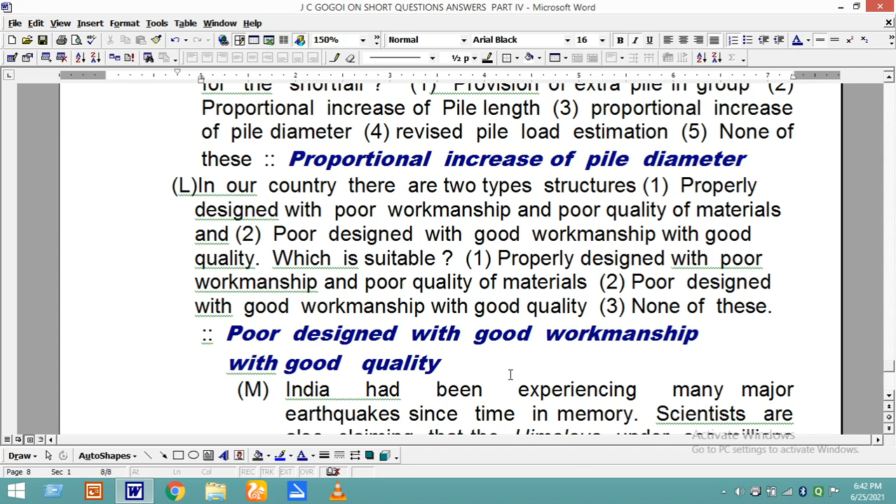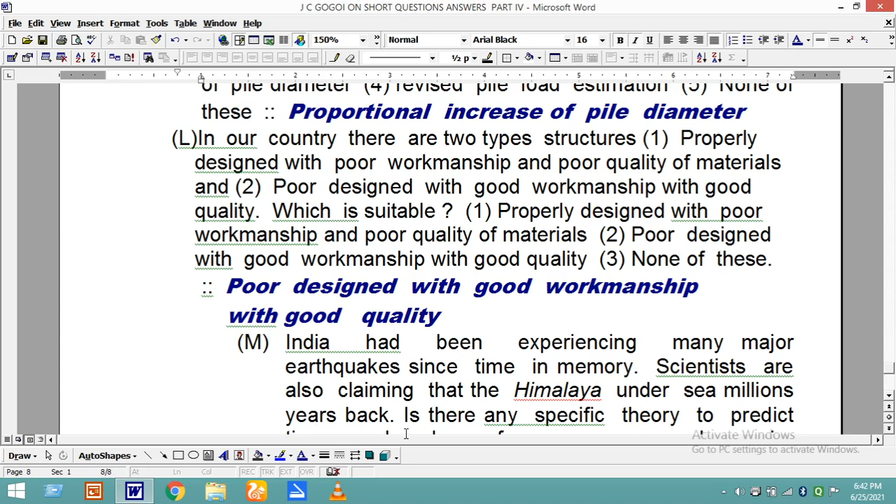India has been experiencing many major earthquakes since time immemorial. Scientists are also claiming that the Himalaya was under the sea millions of years back. Is there any specific theory to predict the time and place of occurrence of such major earthquakes? What is the base of this theory?

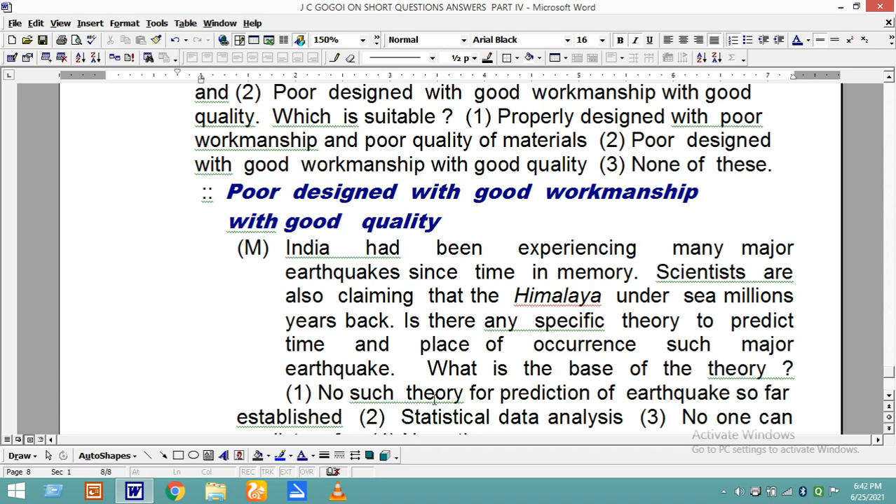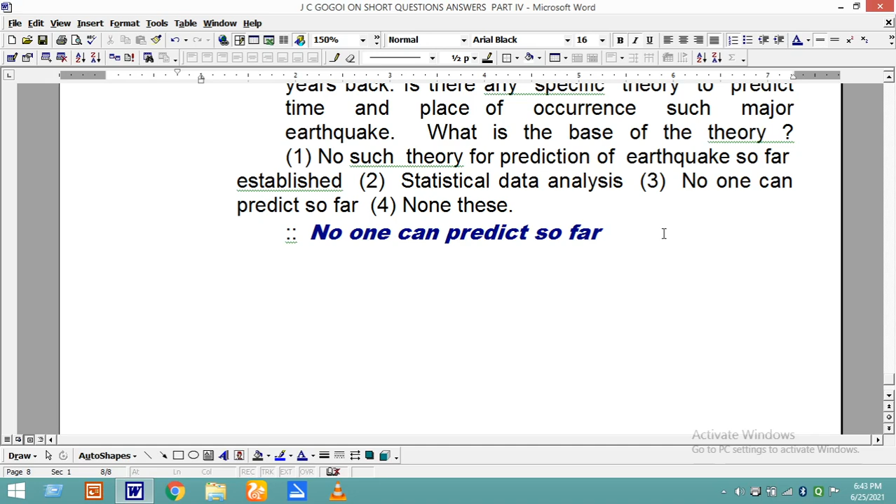We know we are always afraid of earthquakes. Nepal earthquake, Imphal earthquake, Bhuj earthquake — there have been a lot of major earthquakes in our country causing heavy damage to our property and our nature too.

Our scientists always say, especially for the northeast where I am residing, that I always read in the newspaper one scientist saying there are all possibilities of a major earthquake coming soon in northeast India. But nobody says where it will be coming — whether in Assam, Gujarat, Delhi, Bombay, Madras or Chennai — no one can say.

If scientists could give proper information, then during that time, at least 15 days before, we could go outside the state. But they only say there are possibilities of a major earthquake — when and where? If it were sure that it would happen on 15 August 2025 at 12 am, then we could leave by 1st August, go to Bombay or Goa or somewhere else. That would be a holiday trip and safety against the earthquake.